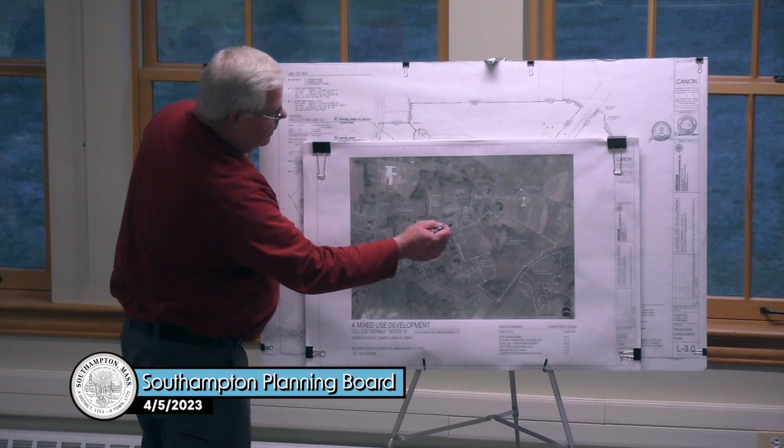I just wanted to go through an orientation of where this piece of property is. The property itself is 44.9 acres of land located on the southeast corner of College Highway. College Highway running in here. For reference, the Dunkin' Donuts and Paisanos building is in here, and Cumberland Farms is here. Park Place is here. The property runs along the northeast side.

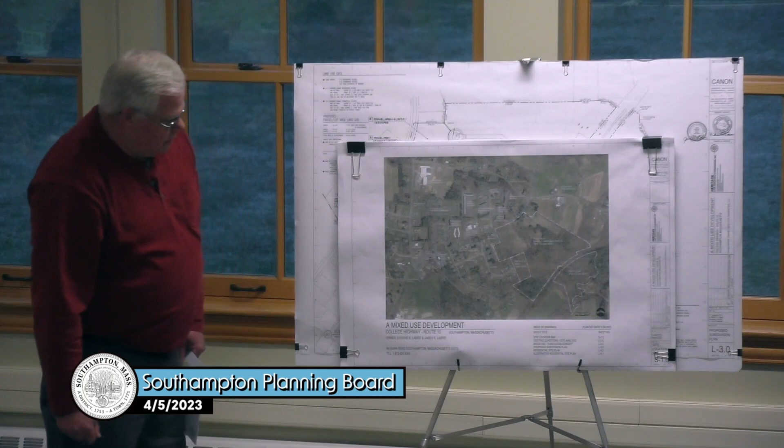The major abutter is the Fowles - I'm sorry, not Fowles. Yeah, formerly Fowles Farm, but Fletcher Farm. The newly acquired rail trail corridor is located to this side, and residential housing relative to the Lynn Drive section. There's a cul-de-sac that comes down from College Highway itself.

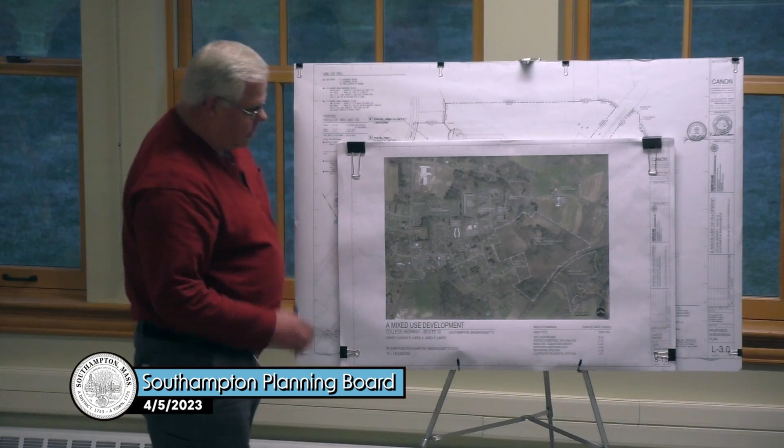As Richard mentioned, we are here seeking a preliminary subdivision plan for an 820-foot long cul-de-sac, which will serve 2 lots. It is shown on sheet L3.0.

So the same orientation as the previous plan, but on a larger scale. Park Place here. Cumberland Farms is here. College Highway running here, and the future rail trail is running on that side, and the Fletcher Farm to the north of it.

This plan shows that the cul-de-sac, like I mentioned, is 820 feet from the sideline of Route 10, College Highway, to the center line of the cul-de-sac. It will come in as a cul-de-sac in this area, which is larger than the minimum standard of the town's regulations under subdivision. There'll be 2 lots that would be served by this cul-de-sac road.

Parcel 5, which is a 5.35 acre parcel, which is here, and parcel 6, which is a larger piece, which is 32.99 acres of land. There are 4 potential commercial lots shown on the plan.

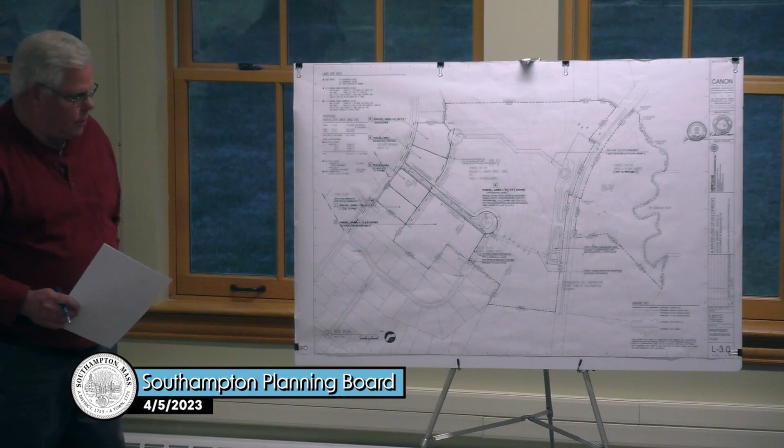Yep, I see that. This plan also shows a potential use of easements shown here that run behind the commercial lots. We envision that when these commercial lots get developed, the driveways and parking areas would be behind the buildings, so that for all this project you'll only have 1 curb cut coming up out into College Highway, preventing a lot more curb cuts off of those properties.

The distance from Park Place to the proposed roadway is 445 feet in length, so there's good distance, and I have some pictures that I'd like to give to the board to take a look at the site.

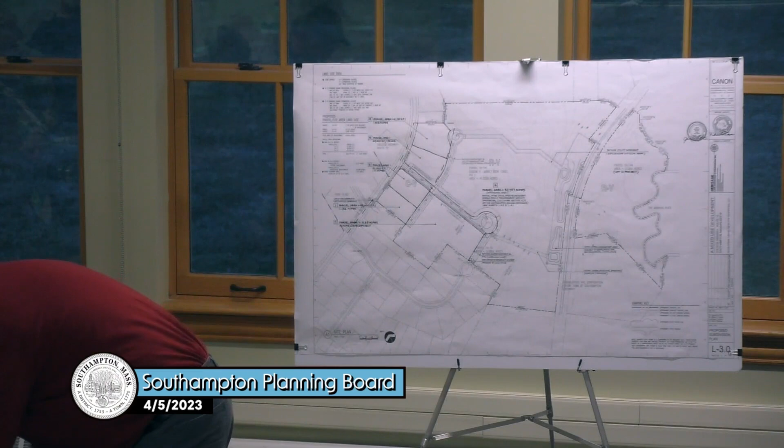Because we are on a curve, we were concerned about the sight visibility. I've got a set of pictures I can share and describe. The first picture is if you were standing on College Highway looking at the property, that would be the approximate location of the proposed cul-de-sac road.

The other picture is the one with the trees and the posted sign. This picture is the view looking to the northeast towards Gun Road. And the last picture is looking back towards Cumberland Farms and Paisanos area.

So as you can see by these pictures, there's a very long sight distance. That's one of the reasons we chose to move the roadway down in this location, because it really gives you the optimal sight visibility both directions for exiting or entering the site itself.

As I mentioned, we're hopeful that these commercial lots would be serviced off of the back through easements. This is not going to be town roadway, that'd be part of the easement on these individual lots themselves. The only town way we're asking for is the cul-de-sac.

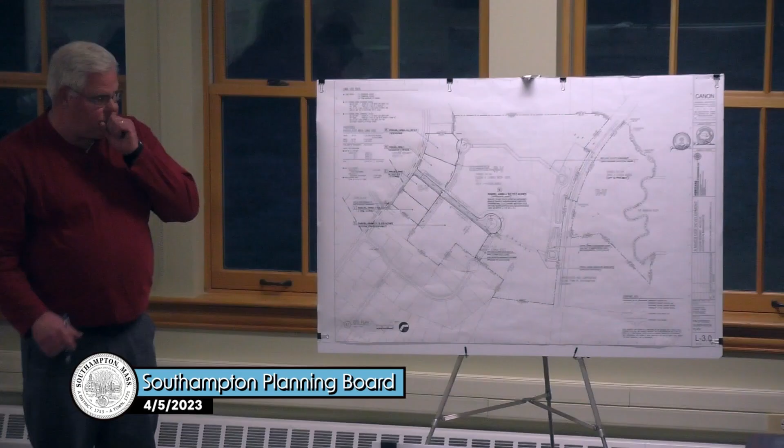Right now, there is no interest from anyone to build on these lots. But in a lot of communities, they're encouraging that buildings be closer to the street and parking lots be behind it, so you don't see parking lots and cars parked from the streetscape. So that's the purpose of this easement.

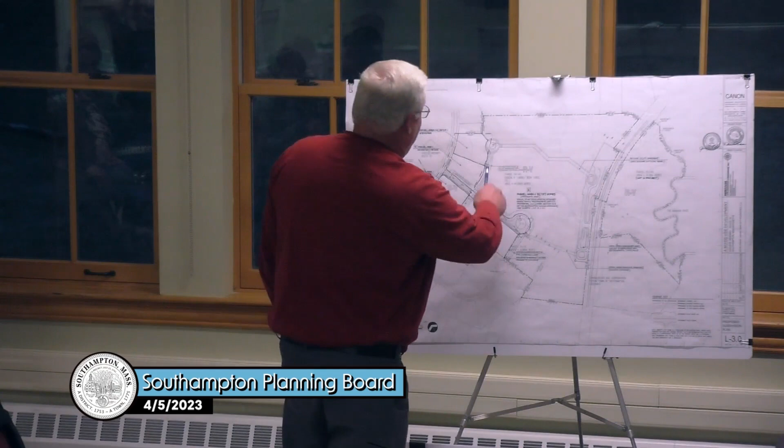How wide is that, Mark? That pavement width would probably be 24 feet, enough for two-way traffic.

So if you've got two-way traffic in there, where is someone going to park? Is it still on the individual lots, Paul? On the individual lots. So that's not a total build-out of those lots then? No, it's not, because we don't know if an office building's going to go in there or not. All right, thank you, that does it.

I have a couple of questions, and they might have been answered elsewhere, but at one point I was reading an email, and you were looking for a waiver on the sidewalk, and now it seems like you're talking about the sidewalk. Yeah, so we're requesting a waiver of sidewalks on both sides.

On both sides? Right, okay. So we are putting a sidewalk on one side. Yep, but we request a waiver for both sides, which is in your zoning subdivision. Now I understand.

That comes with a caveat that there's a payment in lieu of if we waive it, correct? Yep, through the definitive. Well, right, but that's not something we decide on tonight. Right, but I mean, that's the deal where if we waive it, there is a payment in lieu of. What I'd suggest is if you don't decide that tonight, your decision tonight would be to indicate that you have not acted on the waiver, but may consider that at the definitive plan stage.

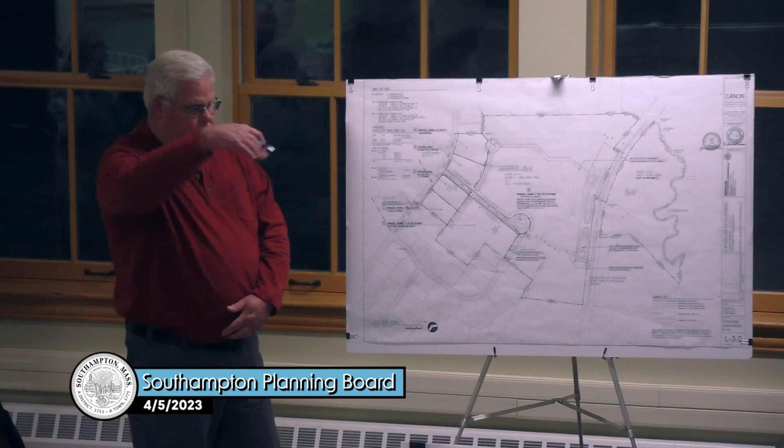The last question is, I know you identified some affordable housing that's going to be built - in which order will those be built? Will those be the first units assigned or the last units assigned? Have you ordered them at all? It all depends on the permitting process we still have to go through, but to my knowledge, it has to be

concurrent with other construction. So if you built 9, the 10th one would have to be affordable. So you build 9, and the 10th has to be affordable. I just want to make sure it wasn't like you built 40 and then the 41st. No, yeah, okay.

You've made the point that we're just looking at the proposed definitive preliminary plan. On the other hand, I think we have to consider what will be put there. I'm on the Public Safety Building Committee, and I'm aware that some portion of this lot is under consideration as one of the properties for the proposed public safety building. Nothing's determined yet, but I think it's important we note this, because that might change things.

But you don't know what's going to be proposed. Right. And that's, therefore, all you have before you is a preliminary plan to create a road and create 2 parcels that may be developed in a variety of ways down the road.

And it wouldn't change our consideration of anything at this point? No. Because at this point in time, what you're basically looking at is, do they conform to the zoning, and do they conform to the standards set forth for a preliminary subdivision plan? And you, as our consultant, believe it does conform to the zoning? Yes. The lots are big enough, as they've laid them out the roadway would provide the frontage for the 2 parcels they're proposing, more than sufficient. So yes.

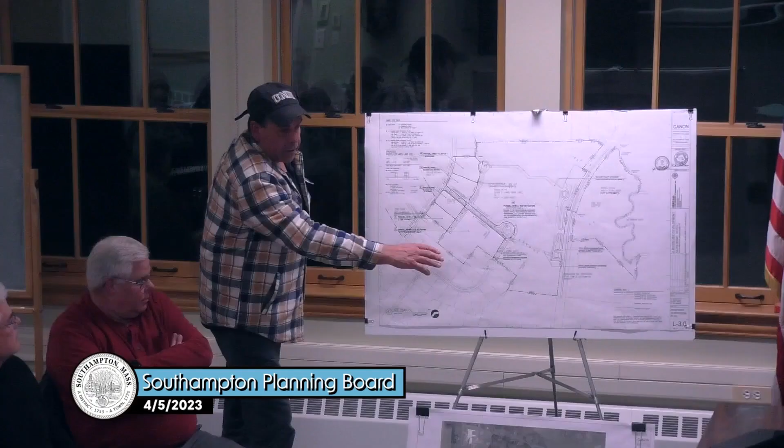Okay, this down here is not slated for anything right now, same as the 4 lots up front. But that's in their study - that's within their definitive, that's going to be part of their definitive site plan. No, that area's not. I think this one is talking about this property right here - maybe I'll work at the same map up here so we can see - which is not part of the project. This being an existing tract apparently that's going to be left out.

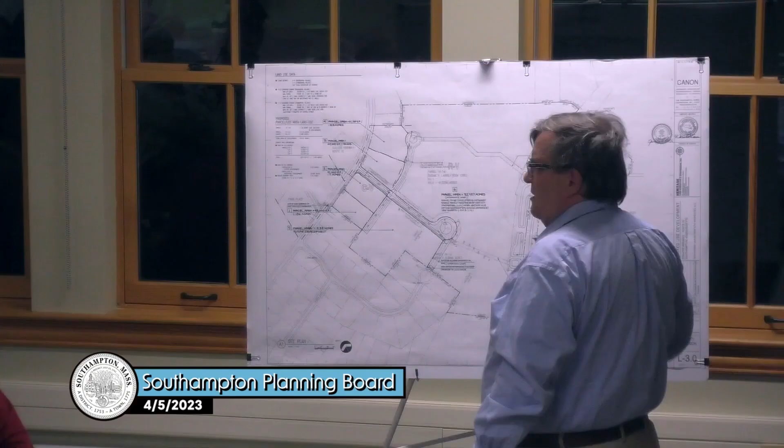What, the one that says RV? Yeah, this right here. But can you clarify which section? Yeah, can you come up and do it at this map, Richard? That's not going to be developed - it's on the other side of the tracks. It's not going to be developed. Yes, that's going to remain open. I understand this one - I'm not talking about, is this the one he's talking about? Undevelopable land. Okay, all of this back here, right, okay, is not slated for development yet.

Right. And so, that's the question. I'll identify myself - this is Chris Grant, 25 Double Drive. Is whatever that's planned to be put in here going to derate that other property, or does that get a completely separate rating that, in combination, will exceed what this would exceed for a single piece of land?

Are you going to derate that other property as a deed restriction or something else that says they got 8,000 of the 10,000, you can only do 2,000 on that property, even though it's not part of their development - it could be part of a future development?

So are we talking about parcel 5 here? Is that the one? Yeah. So parcel 5, that's not part of this? Well, it is part of this application relative to the preliminary subdivision plan. Right. So what the board is looking at is a cul-de-sac that would serve parcel 5 and 6.

But I guess my point is, we're just focused tonight on the cul-de-sac that has all these abutting parcels that are going to be accessed by that. And then when you come back for definitive, you're going to address the disposition of that parcel at that particular time - that's going to be addressed at the definitive.

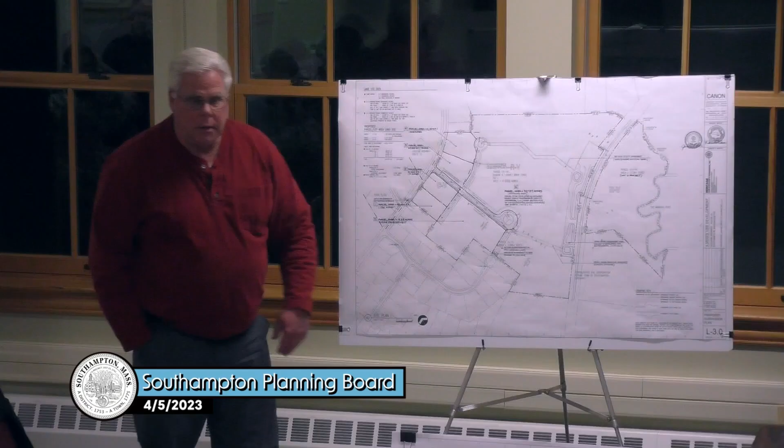Sure. So there's local approval from the planning board and the definitive subdivision plan, and a stormwater permit for whatever gets developed on this piece of property, if you exceed over 40,000 square feet of land disturbance. So that trips that stormwater permit from the planning board.

Okay, so that's a local permit. Yep. The other permit would be if there was any development of the 5 or any of the other lots here, you may require a zoning board of appeals permit. That would be a special permit, no variance required. The other is because College Highway is a state highway, we have to get a curb cut permit from MassDOT for the roadway itself.

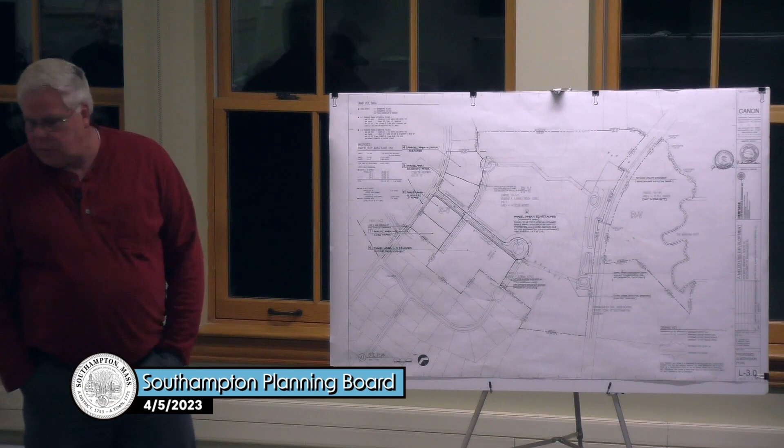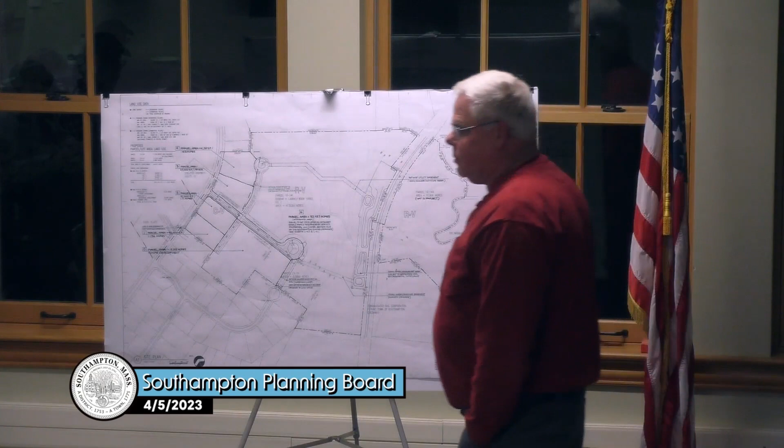So those are the... You mentioned the conservation situation and the wetlands. Sure, yeah, so this property was looked at relative to any wetlands on it. There is a small area of wetlands, over in this section of the property. Being 35 acres or 34 acres, we don't see any jurisdiction of the Conservation Commission for this area down here. We'll be well outside the 100-foot buffer zone.

The point I was getting at is, do you anticipate that with the state permit, you'll be filing with MEPA, the Massachusetts Environmental Policy Act, which specifically looks at cumulative impacts, and because the property is under one ownership, would give consideration to the entire anticipated development? We don't anticipate hitting those thresholds with the projects.

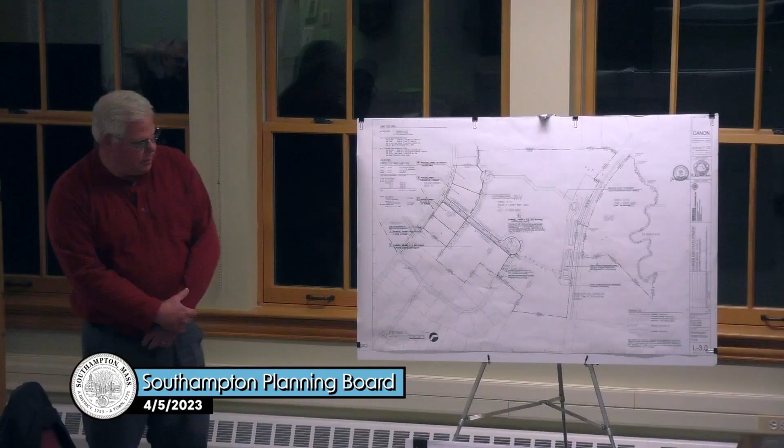But again, trying to get through certain steps that we have to go through. Yes, sir. I guess I've got two concerns. I'll do them in reverse order since we're talking about water, right? So I'm on 25 Helen Drive. There's already a stormwater easement, which I believe is from Lynn Drive, that comes into the corner of my property here. It dumps a lot of water here. My leach field is literally right there.

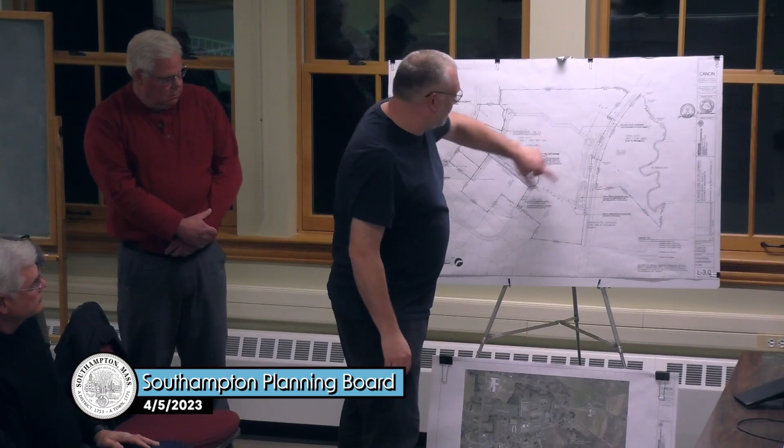Okay, we're going to be proposed—I know it's not necessarily exactly on this plan—but the water's going back here, right? I had my septic tank pumped today, had one of the local guys do it. He said, you have no idea how that's going to affect the water back there if it's going to impact your leach field. He said, pay attention, there might be a concern, and it might not impact it on day one, it might not impact it on year five. Eight years down the road, after we've dumped water there for eight years, I don't want to be on the hook for a failed septic system because of this development.

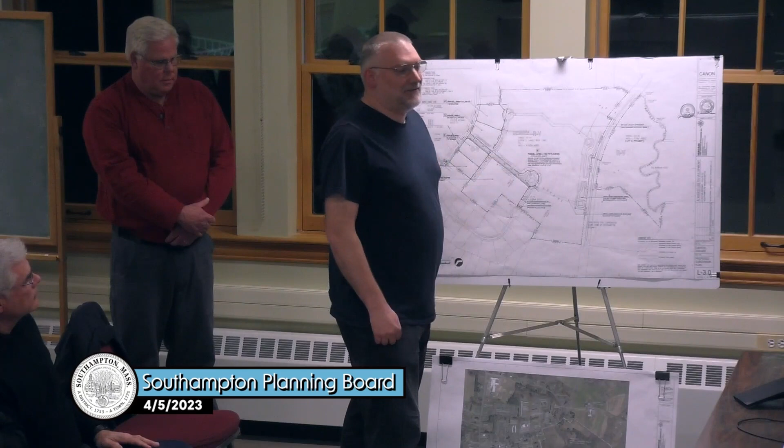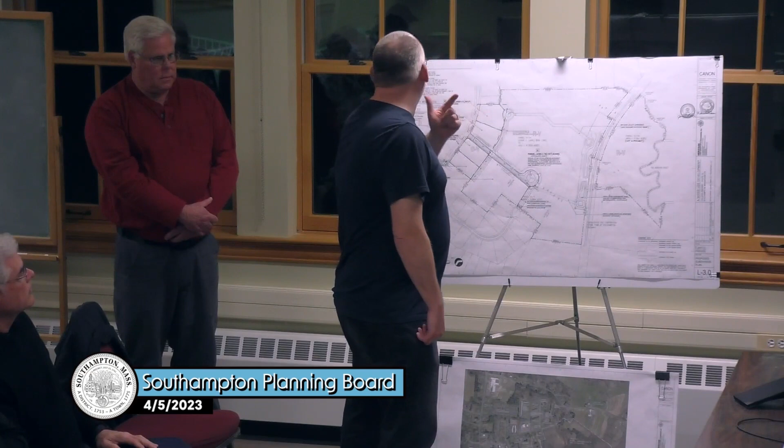So that's number one. Number two, I don't want to call you a liar, but we had a lot more discussion about traffic on Monday night. You had trip estimates—you told them you did not have them. What? I didn't hear that. Trip estimates—you told them you did not. Right now we don't have a full build-out, so I can't tell you. So did you tell them incorrect information Monday, or are you telling them incorrect information tonight? That's a different application altogether. Yeah, it's not pertinent to what we're talking about tonight here.

Okay. Anyone else with comments or concerns, questions? Any other questions, board? I want to be clear about this. So the concerns I'm hearing from the people have to do with stormwater and runoff and septic systems getting overloaded, et cetera. And if we were to agree to this tonight as a planning board, based on just the footage and that aspect of it, not the definitive development plan, what would we be doing there if, in fact, these other things are not resolved, or at least they're coming up as concerns of the neighbors?

Well, the way I see it, we approve the cul-de-sac, and then it devolves upon the applicant to do their homework with the Board of Health—especially the Board of Health, I guess—regarding the number of units and how much that property can withstand.

And that's, we can only go by their expertise and what they recommend. I can't refute them unless we want to get an independent person to come in to oversee and comment on what the Board of Health is going to recommend.